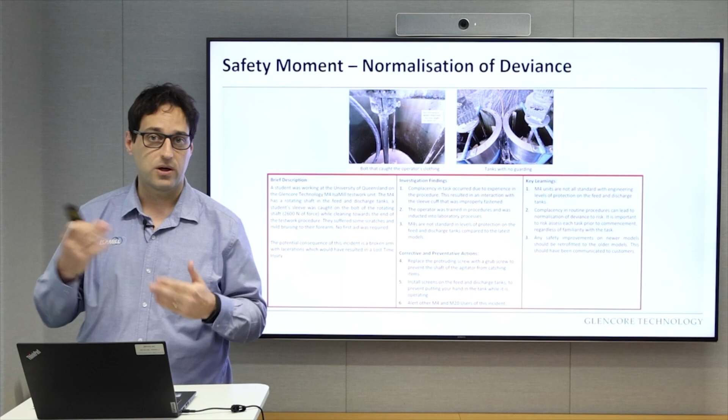Here we recognized that we needed to change a bolt and put some screen protectors on top of the tanks. The more you operate something, the more it becomes normal, and this is why it's always good to stop, reflect, and have a check whether it's really safe to operate anything.

Now, what is the agenda for today? I'm going to take you a little bit through the IsaMill technology fundamentals, a little bit on the test work and scale-up, predominantly what to look for, what to understand, and how that influences your inclusion into your flow sheet. I'm going to take you through how to size an IsaMill, a little bit about why ceramic media is important, what the SG does, the size, and at the end I'm going to go over a few of the recent projects we've been doing, as well as a few of the IsaMill developments of late. So, hope you enjoy the ride.

Now, the fundamentals. The purpose of the IsaMill is to liberate. We know valuable minerals are locked in the ore. We want to separate them through froth flotation or other processes. So what we want to do is find a way to break them up economically.

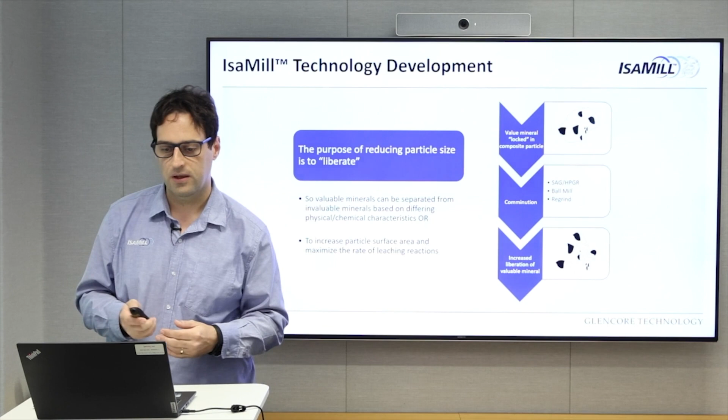Historically, everyone has always used and gone after the easier deposits, such as Broken Hill. Because the finer you go, the more power you need, and hence your OPEX and CAPEX increases. Therefore, deposits like McArthur River, with about a 7 micron grind size, don't typically get exploited first. And what happens when you need to start exploiting those deposits? That's pretty much the story on how the IsaMill came to be.

Fine grain mineralogy requires a finer grind size. In the 1980s, Xstrata, or Mount Isa Mines at the time, recognized that they had to go to 7 micron grind size. So, how do you go about it?

The first step, as you would, what do we have currently in the market? So they went out, had a look, and then started thinking, let's try to get there with tower mills and ball mills. But when they tried it, they found that when you use those technologies, the power consumption is significant, and the steel media had a negative influence on the flotation performance.

Iron dissolves in solution, precipitates on the surface of the particles as iron hydroxide, inhibiting your flotation response. So these technologies were trialed, but unfortunately no success. So what do you do? You start looking outside of industry and look at similar industries where there may be an application. And that's what started the IsaMill journey.

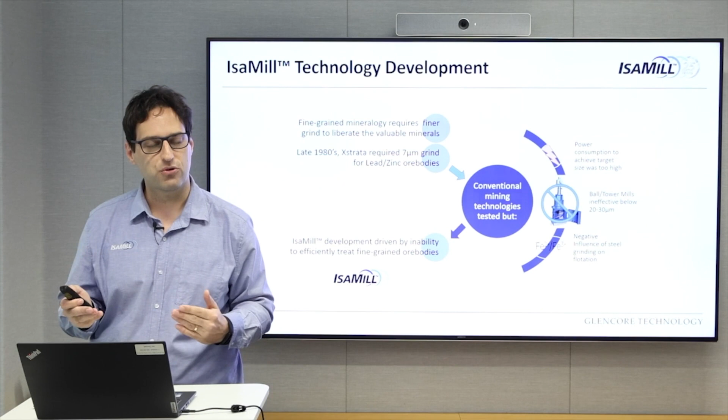After a bit of searching and looking, a technology was found. We worked with and developed a partnership with a company called Netzsch, who specialized in the pharmaceutical, food, and paint industry. They used these very small mills with small, expensive media. And when it was tested at Mount Isa, what kind of resembled a milkshake maker and a drill, what we found was the ability to stir the media ground sufficiently.

So, what next? You had to make it work in mining. So, what does that mean? Larger scale equipment, make it continuous, and you've got to make the media usage cost effective.

And that's pretty much what caused the IsaMill to go on its developmental journey.

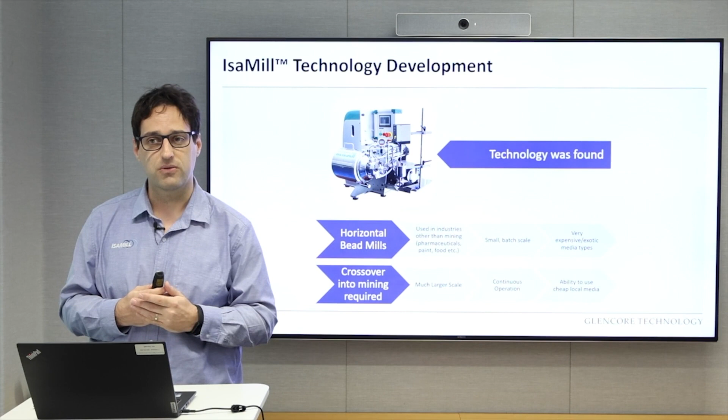So what's the timeline of this process? In the late 1980s, the first large-scale mill was developed, the M3000, developed by Xstrata and Netzsch. The terminology I use is M for mill, and the number is the size and capacity in litres. So M3000 is a 3,000 litre mill.

That mill was tested, prototyped and piloted in Mount Isa, and found to be a great success. So much so that the first official IsaMill was installed at Mount Isa Mines in the lead zinc circuit in 1994. This enabled Mount Isa Mines to advance the McArthur River mine because they now had a technology that could sufficiently liberate at 7 microns. This was a great start into the process.

In about 2001, Mount Isa Mines decided to commercialize the IsaMill to the wider market. As we did that, we started talking to more clients, and in about 2003 we started working in South Africa in the platinum industry. Through those conversations a very good point came up: 'I really like your technology, but I'm not going to put 30 of them in—make them bigger.'

So a whole lot of work was done, and we tried to scale up to the M10,000. We went from about an 855 kilowatt mill to a 3 megawatt mill. A lot of that development then allowed higher throughput rates and coarser feeds.

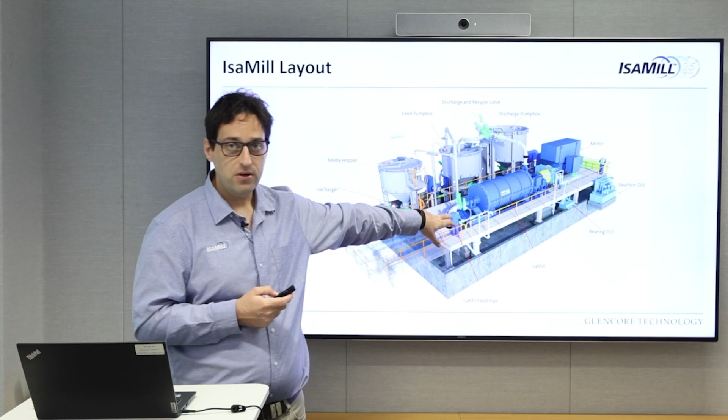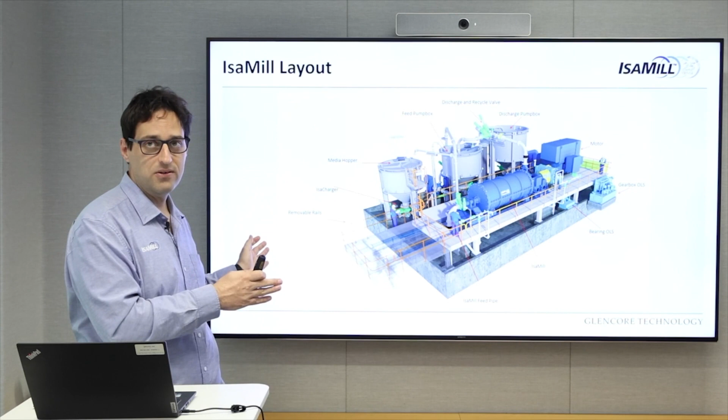We now have removable rails. The rails are for maintenance, because everything is on hydraulics—you can shut the mill down, use the hydraulic rails to open it up, and do your maintenance within 3-4 hours. So it looks good from the outside. Let's have a look at what's happening inside.

Inside the mill, slurry is pumped between 50 to 150 kPa. Inside is a fixed speed shaft with a series of discs on it. Those discs change per operation, but typically it's 7 to 8 discs. Since they're on a fixed speed shaft, they rotate around 18 to 20 meters per second.

As those discs rotate, it agitates a whole bed of ceramic media. Inside that mill you're looking at around 75% of that volume filled with ceramic media, and those discs agitate this environment. When you add slurry, you're applying centrifugal forces which pull your coarser material out and let your fine material move through the center. This means your coarser material will typically be retained while your fines move through the mill.

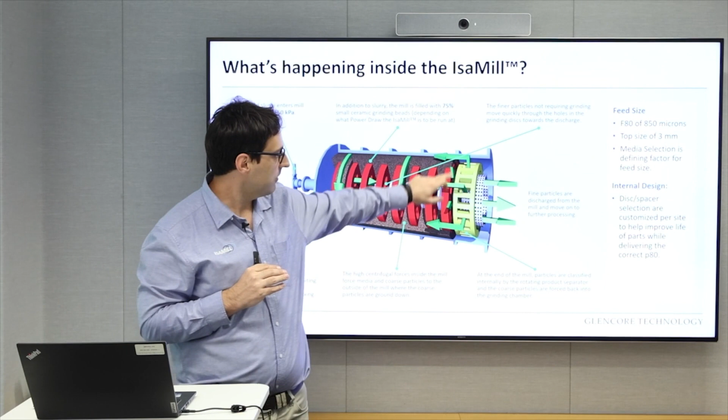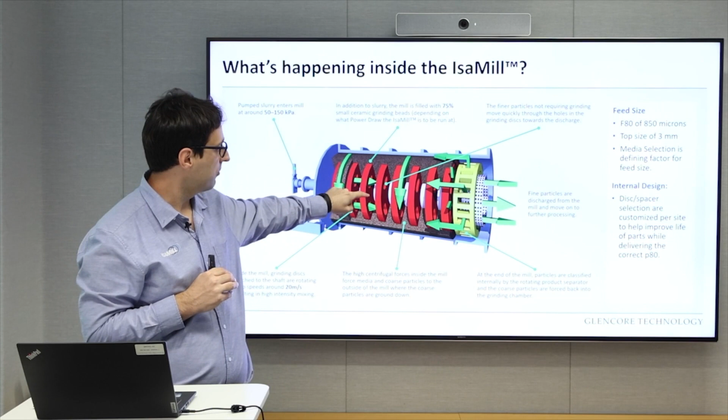When we get to the end of the mill, the gap between this disc and this rotor is actually smaller relative to the other discs, and this is done deliberately. The smaller gap creates a hydrodynamic force which pushes slurry out to the edges, and then this rotor acts as a pump, pumping back towards the front of the mill. That means coarse material that moves out here cannot move through the mill and out—it gets retained while it's ground fine enough before it can leave through the center. That is how the mill works, and that's how it internally classifies.

The mill itself can typically take a top F80 of about 850 microns with a top size of 3 millimeters, and that's lately driven by some of our coarse grinding work. But the most important thing with a stirred mill is the media you select will dictate the feed that you can put to the mill. That is key.

Now the internal design, like I said, can change. Typically it's 7 to 8 discs—small discs, large discs, different spacings—and this is all done to help the site manage wear. You want a mill to deliver what you want, but you also want to reduce the number of times you shut the mill down, so that's why we develop different components to allow you to do so.

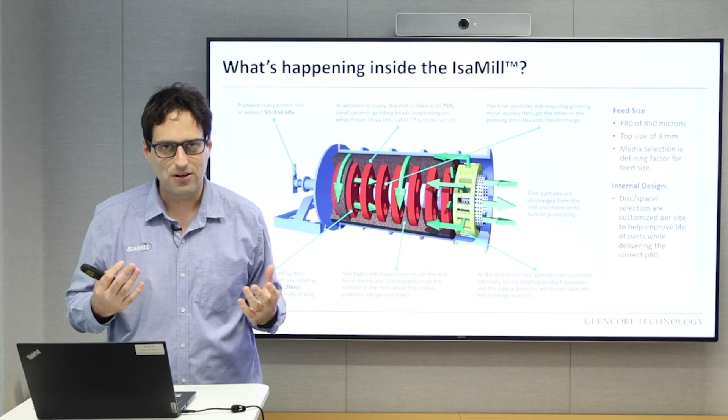Now, I talked about that rotor and that classification, and I can talk and show you pictures, but what does it actually look like? That's what my next slide is. To prove that point and really demonstrate the effectiveness of that rotor, we thought it'd be a good idea to put a glass shell on a mill.

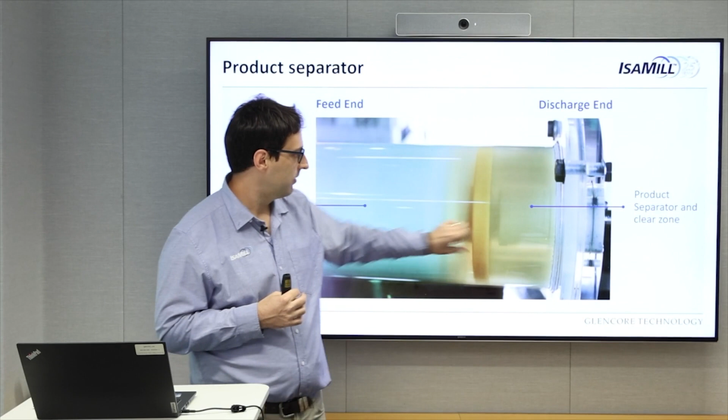So this is an M20 mill, and this is glass beads because we didn't want to use ceramics on glass, it might break it. And we started the mill up. This is a photo when the mill was running, but when the mill is stopped, the beads sit along the bottom of the mill. As the mill starts up, this zone gets an intense mixing zone, and as it stabilizes at steady state, this rotor acts as a pump and keeps all the material away. That's why in this picture you can see clear fluid, glass beads. That's that self-classification mechanism that I've been really trying to address.

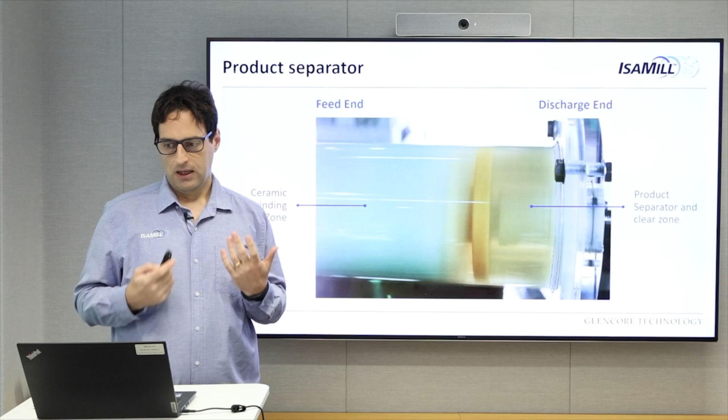Now, what's that look like when you do test work? That internal classification is going to preferentially grind coarse material. As you grind coarse material, you're going to produce a more uniform product. This mill will scale up 1-to-1 with a full-scale installation.

Here, we've got some of the older data from a paper back in 2005, but what you can see is, in the initial test work, the MRM plant IsaMill and the Century Lab scale mill produce very similar P80s and similar P98s. When the Century plant put in their full-scale mill, that P98 ratio increased dramatically. What that does is it will theoretically hurt your leach recovery and your flotation response.

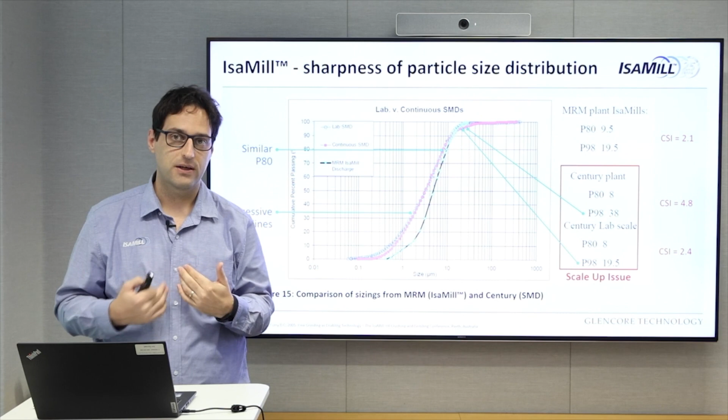In this example, we did a rough study showing you the effect between the two technologies, and the IsaMill achieved probably a 2 to 4% increase in recovery. But if I do that in a model and say I model about 125,000 ton per year copper leach plant, you're looking at about a 6 to 11 million USD revenue difference from that 2 to 4% increase in recovery. So it's very valuable to look at that.

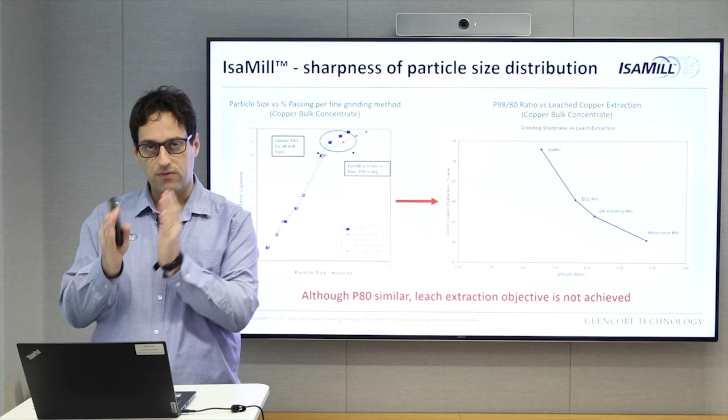And when you look at mills, always look at the full PSD. Do not focus on that P80. So that's how the mill works. But how do you do the test work, and does the test work scale up 1-to-1? Spoiler, it does.

So any mill will scale up with each other. We do a lot of our test work at labs around the world. We accredit labs to do the test work on our behalf. We don't control the test work. We do it on the M4, which is a lab scale mill, 4-liter mill, or you can pilot it on an M20 as we have down here.

We use these to obtain a specific energy. A specific energy is not the same as Bond Work Energy. It is measured through total power via the VFD. It is not inferred by torque measurements.

This mill will run a signature plot, and what we do here is a batch pendulum style test. So we have 2 tanks, batch pendulum, we fill one, pump it through the mill, send it to the other. And you do that enough times until you get to your grind size and measure your specific energy. That will scale up 1 to 1 with any size mill if it's performed in the accredited lab.

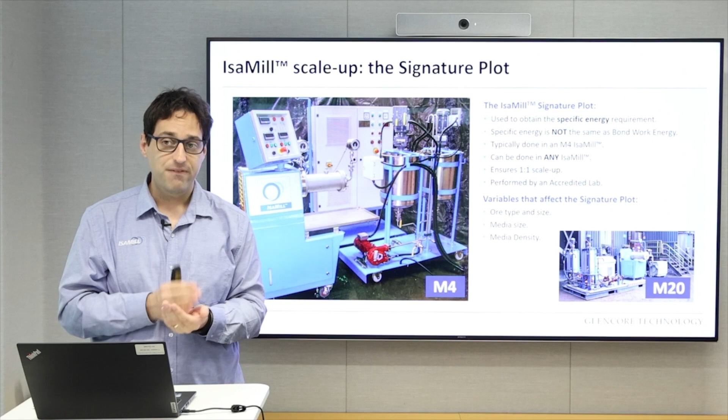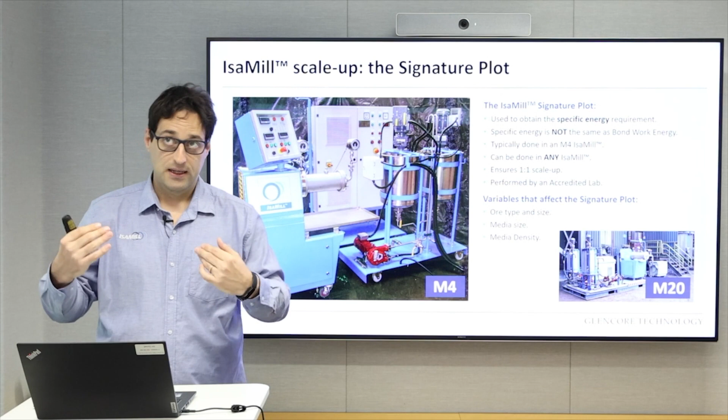Now, if I say it scales up 1 to 1, what you are aware of is you need to be aware of your ore type, size, media size, and density. That will really, if they're the same, it will scale up 1 to 1.

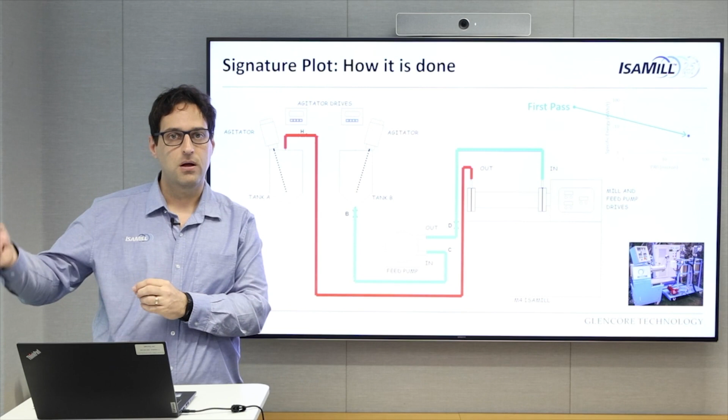I will collect the sample, I will measure the P80. When it's at steady state, I know my total energy. Therefore, I know the energy to go from this size to this size. And I'll be able to calculate my specific energy. We measure it so the particle goes through once. There's no chance of it going through multiple times, so you get an accurate representation of that grinding energy and reduction.

Now, I then want to do my second pass on the sig plot. I reverse everything. This becomes the feed tank, goes in, through the mill, and back out. It's my second pass. And you do this enough times until you get to the grind size you want.

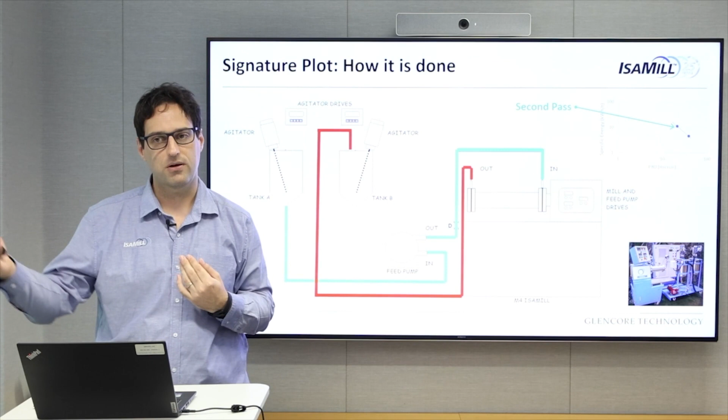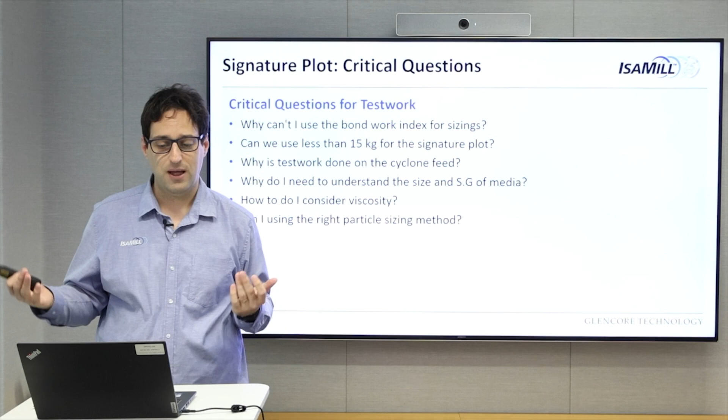So, pretty simple, but there are some intricacies and practicalities I really wanted to discuss as part of this workshop. First, why can't I use the bond work index for sizings? Some people use 5-6 kilos, you need 15. Why is that? I'll touch on that, what you actually use for your sample, the influence of media size and SG, why viscosity is important, and am I using the right particle sizing method? Let's go through these.

Everyone knows, and a lot of people will use the bond work index to generate determination of specific energy. This is quite common in comminution, but it's a little bit more awkward in stirred mills, specifically once you go sub 100 microns. The reason for that is the exponent, the minus 0.5, varies sub 100 microns.

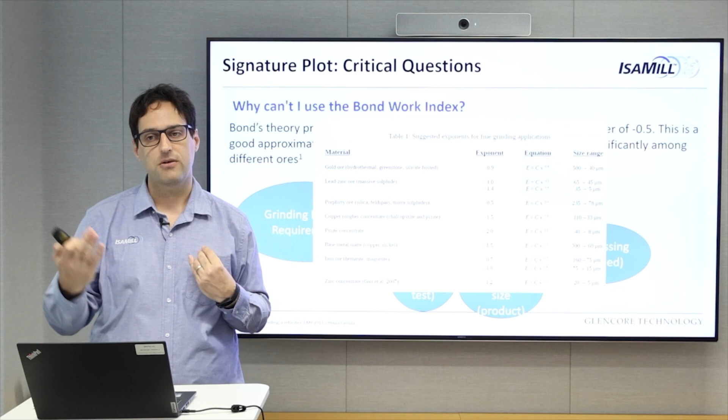Secondly, all these mills are also slightly different, so there's a bit of variability that we've seen with bond works going out there. To reiterate that point, I've referenced one of the papers from CMP 2017. As you can see, the exponent changes depending on your material. Hence, if one of these comes up, I would use bond work as a sanity check, but I would speak to GT. We can provide a specific energy from our database that might be a more useful figure to use.

Now, what if I only have 5 kilos? Maybe I can use this. That is not necessarily true. The purpose of using 15 kilos for your sample is as a rough rule. You want to have enough sample to fill that mill voidage volume inside the test 3 to 4 times over. When you do that, that drives up your sample mass.

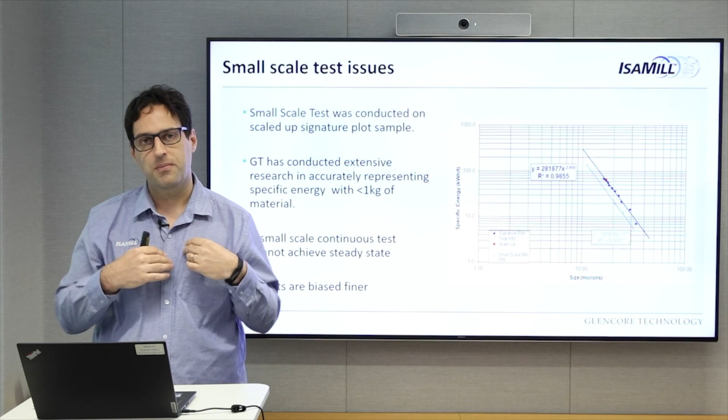It's the same sample, right? Why is it different? Goes back to that steady state - small scale tests that don't achieve steady state typically hold up coarse particles between the media, so your results will always be biased finer. If you're taking that through to a full-scale level, it can really have implications when you start looking at what your required mill size and motor size is needed. So all I really want to stress is be wary of your sample mass when you do a stirred mill test.

Now, cyclone feed versus cyclone underflow. I'm doing my mill sizing. I want to do my sizing on the mill feed. We at GT prefer cyclone feed to cyclone underflow when doing mill sizings. All our sizings are sized off fresh feed, not mill feed. I understand fresh feed and throughput rates will be more than your direct mill feed, and it'll be slightly coarser in your underflow. What we find is those two typically even out, and it will line up well.

What you can't do well in a lab - and I apologize, I'm happy to take questions if anyone disagrees - is it's very hard to get a design-representative cyclone split in the laboratory or on a full-scale mill. The fact that you can size off your cyclone feed gives you versatility if you want to size in open circuit or closed circuit, and it actually is a benefit in that regard.

Now, media size. This is one of my favorite graphs. This is a bit of a study that was done on a mine site. What really drove this discussion was, what was my required media size? We have a matrix, which I'll show you in a bit. When we did this sizing, we recommended 1.5 millimeter media. Now, as turnover happens on site, things change.

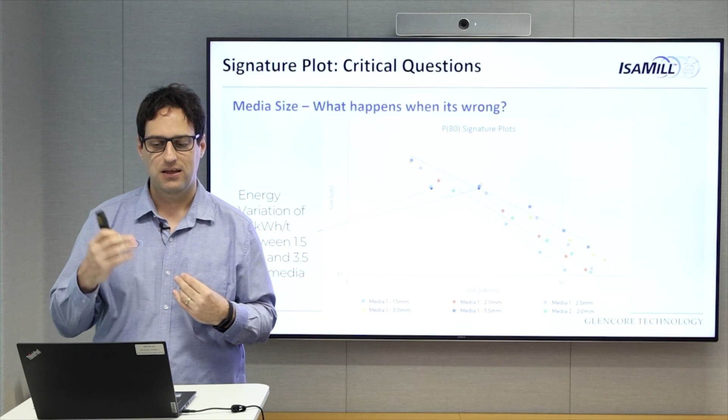Now, viscosity. Why is viscosity important? Viscosity in a stirred mill directly relates to your ability to grind. If it becomes more viscous, imagine a solid mass moving round and round. That basically drops your grinding efficiency. What we know is that operating density, particle size, and specific ore characteristics all feed into keeping that viscosity manageable.

So what do we do? As a rule of thumb, we design our mill to operate at 20% solids by volume, per the design condition. In practicality, a magnetite operation is 50-55% solids by weight, while a coal operation is closer to 30% solids by weight. But by keeping that at 20% solids by volume, we notice the most efficiency.

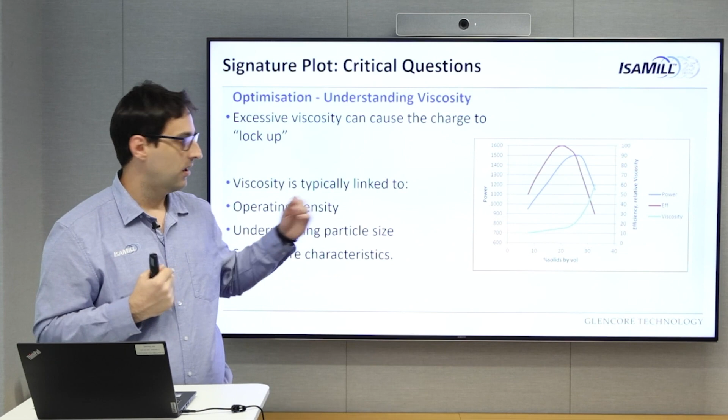This is attempted to be described through this graph here. X is percent solids by volume, Y is power. Up around that 20%, you get about 100% efficiency. Once you move past it, that efficiency drops, and so does your power draw. Hence that locking up I was talking about.

Sizing. Sizing is important. There is no right or wrong way to do sizings, but you have to be aware of the implications of the method you select.

Laser sizers work off the equivalent sphere method. What does that mean? It means it takes the volume it measures and assumes it's a sphere. That doesn't take into account particle shape. I borrowed this from a Malvern paper, but as you can see, the same volume exists between these two particles. If you ran this on a laser sizer, the 39 micron sphere would record 39, but on a screen you're looking at less than 20 micron.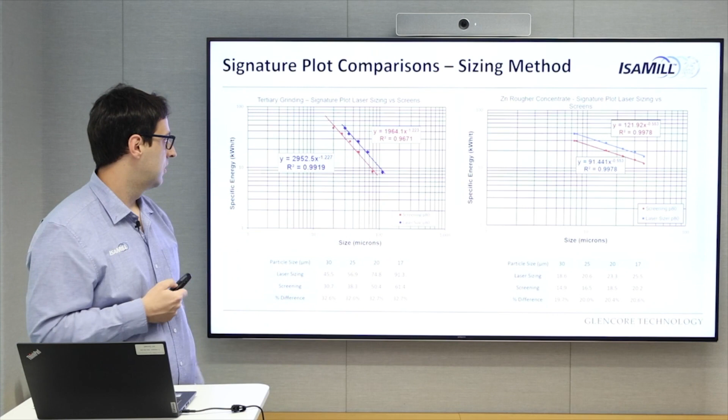This is a tertiary grinding application, a zinc con regrind. 32% improvement just based on what you used. Quite important - 20% based on what you used. Particle shape needs to be acknowledged and understood, particularly when you're looking at sizes greater than about 30 to 40 micron.

I wanted to also touch on the signature plot and full scale installations. I've talked about scale up, but I've only given you one example - that's not really helping, right? So here are a few different examples. We've got 6 signature plots and a pilot trial, and 6 examples of scale up.

Gold at Kumtor: green dot's the survey, blue is the signature plot. Platinum tails: green dot's the survey, blue dot was the pilot run. MacArthur River zinc concentrate: blue dot, linear relationship, green dot was the survey. Ernest Henry magnetite mill: same relationship. Mount Isa zinc: same relationship. Arium magnetite: same relationship. Papers are here.

If you'd like to see them, feel free to contact us, we'll give them to you. But what I really want to stress is if you do the signature plot correctly, these will scale up 1-to-1.

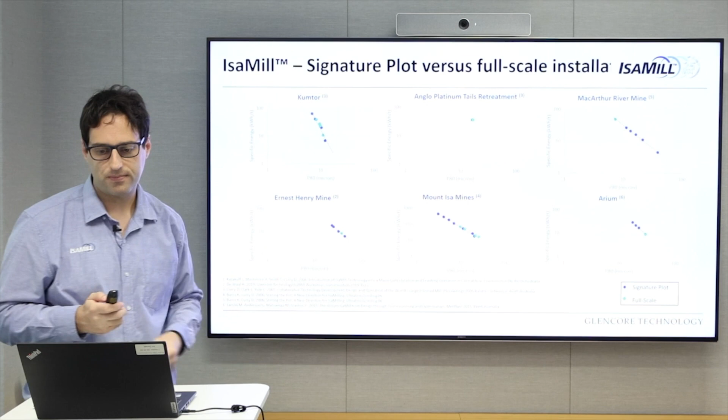So I'm not going to go into bad-mouthing different techniques that are out there, but what I'd like to stress is this is not common, and this is published information. This was an Amira campaign between tower mill estimates and measured plant performance. What you find is your vendor estimates when the mills went in versus the applied performance are typically out by up to 60% at times.

And here on the commissioning data at Sunrise Dam, you can see for a specific particle size, your energy demand can be anywhere between 40 and 90 kilowatt hours per ton. That's not 1-to-1 scale up. So potentially you want to get it right at the test work level.

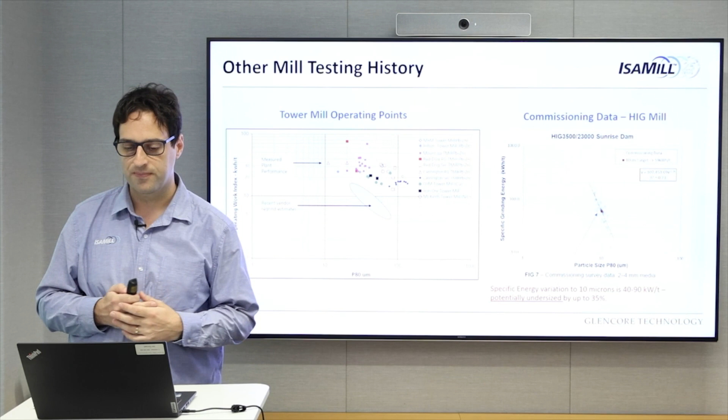So where can I do these tests? Now, there are signature plot labs all over the world. We have ALS Perth in Australia and West Coast, HRL testing in Brisbane, Core Global Met Tech in Perth, Certimin in Peru, Base Met in Kamloops, SGS Lakefield in Ontario, PT Geoservices in Indonesia, King's Beads in China, and COREM back in Quebec.

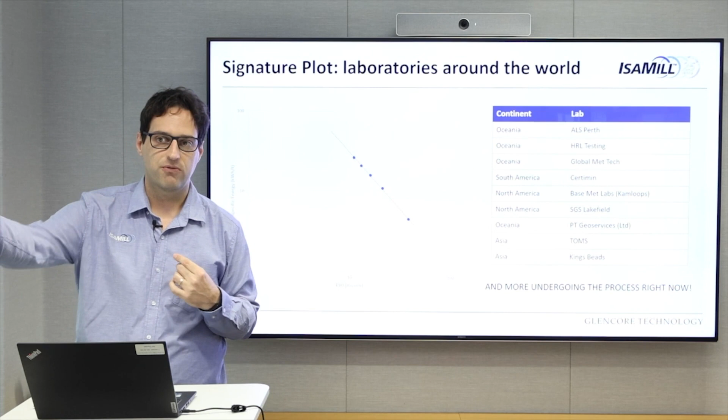We are trying to get more and more labs out there, and what we want is to have your labs as your first point of contact. They work with us, we review it, we work with them, get the conditions right, but we want them to have the autonomy and run with it. So we're very much open in that regard.

So, how do I size an IsaMill? Probably one of the reasons you're all here.

So sizing IsaMills - this is a very heavy slide, a lot of words, but sizing an IsaMill is actually quite simple. What we really need is a throughput, feed size, product size, which dictates your media selection, specific energy for your particle size, which comes from your signature plot, expected feed slurry density and/or specific gravity. That feeds into your percent solids by volume. With that, we can pretty much do a sizing. We do prefer additional information, but that's mostly because we're engineers. At the end of the day, it's quite simple to run with.

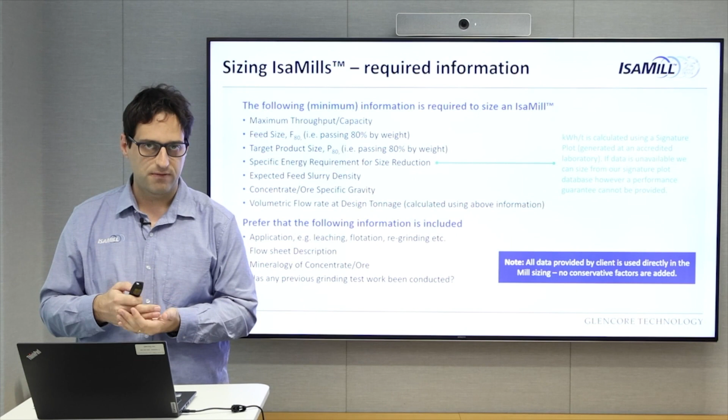With this slide, just notice the comment in the bottom right - we don't apply scale-up factors. We take the information you provide and we run with it. We don't add an extra 15% to the values because we want to be as honest as we can.

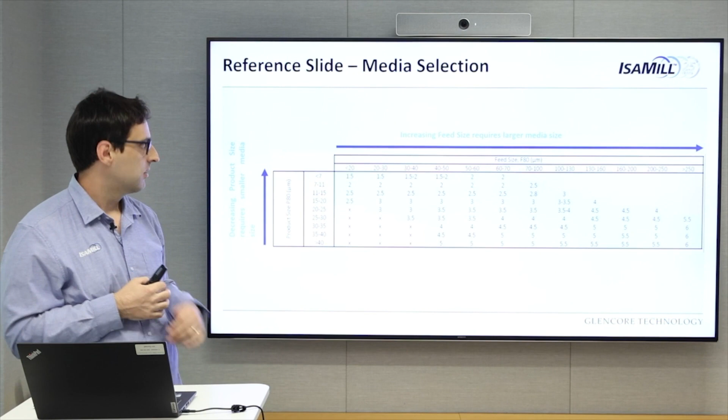So I've got my mill. Now how do I select my media? Here I've got a matrix for you. Up the top here we've got the feed size, up the left here we've got the decreasing product size. So if I want to select a media, say I want to go from 65 micron to 17 micron, I go 65 down to about 3 and across to 17 micron. So what that means is if I want to do this efficiently, I need a 3 millimeter graded charge. So now I've got my media selected.

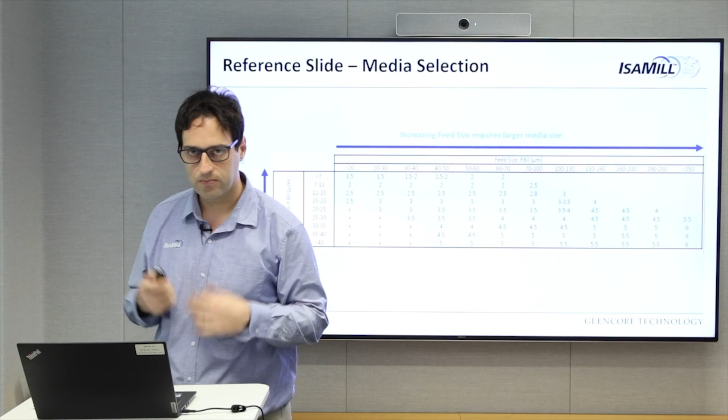Now we go look at flow rates. The mill is limited on motor capacity and flow rates, so if you're okay on your power, you just have to look at your flow rate. And that's what I've got here for reference.

A rough rule of thumb that you do need to be aware of is that all the mill components are rubber. So to protect the components, we actually interlock the mill at 70 degrees slurry temperature. That equates to a much higher surface temperature on those rubber components, but it's there to protect the life of the mill. You want to design the best mill for you, but you want to make it last as well.

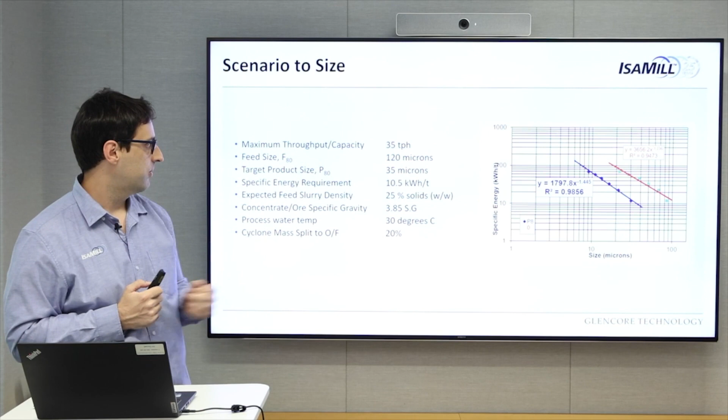So let's do a scenario. I've got a signature plot here which was done - client did this. I've got my linear scale up, and now I want to size it. In this case, I'm going to go 35 tons per hour, feed size of 120 microns down to 35 microns. From this graph here, to do that I need about 10.5 kilowatt hours per ton. It's a float concentrate, float con regrind, so that's about 25% solids by weight feed, so obviously it needs to be densified going through the mill. My ore specific gravity is 3.85, copper deposit.

My process water is 30 degrees, that feeds into your heat balance. Your cyclone mass split overflows 20%, which reflects how much you're actually feeding the mill. Put that through the calculations, I spit out a mass balance here. Key things I look for in particular are maintaining the right density, around that 20% solids by volume in your mill feed, looking at your discharge temperature to ensure your heat balance is okay, and ensuring everything balances. This is the output from a heat and temperature perspective.

It's okay, it can remain open circuit, and a mill was selected. In this case, we selected one M1500, 1,500 kilowatts. This is a standard output when we run our mass balance, and this is something we give for free. We also give OPEX numbers, but it gives you an idea of how these mills run.

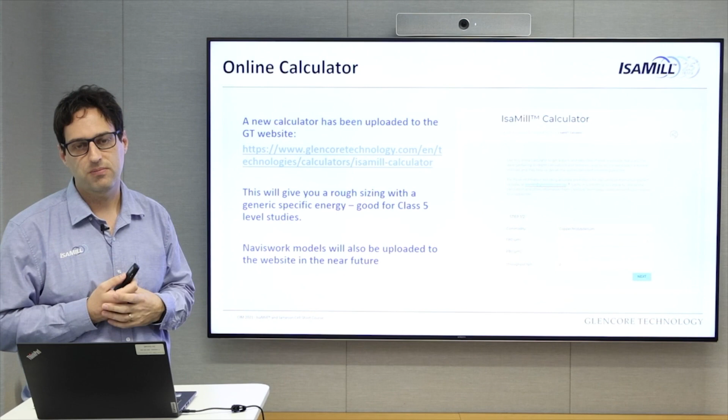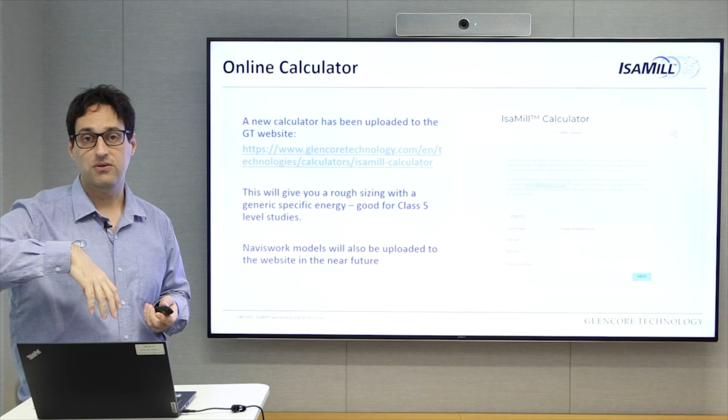Now, we can do these mass balances for you, but let's be honest, you don't want to talk to us all the time. So to try and make things easier, we've developed a calculator. It's on the website. It'll give you a very rough sizing, but for me it's good for desktop, class 5, concept level studies. In the future there'll be Navisworks models, so you'll be able to size a mill and take a Navisworks model and just drop it into your plant design. So this is coming.

So I talked about open circuit design. What happens if I go closed circuit due to heat? How do you actually do that? I wanted to give you a bit of an example in the design process.

You want to make sure your density is still efficient to the mill. You can't be too dilute, otherwise you lose your grinding efficiency. You can't be too high because of viscosity concerns. I need to manage heat as well.

So what you do is your fresh feed will come in, go into your discharge pump box. That discharge pump box will go up to a cyclone overflow. That underflow will be at 20% solids by volume and feed the mill. Your fresh concentrate will be 30 to 25% solids, will be diluted here, and it will go through the mill at the desired density and then go back to your feed discharge pump box.

Now I need to manage heat, so what else am I going to do? I'm going to add water. That water will cool it down, dilute it, much more manageable, controls it through to your cyclone overflow. That's how our closed circuit design works for heat management.

Now, this is pretty much me going through it. Key things here different: we typically have about 125 to about 200% recirculating load if we need to do so. And this is how we control it.

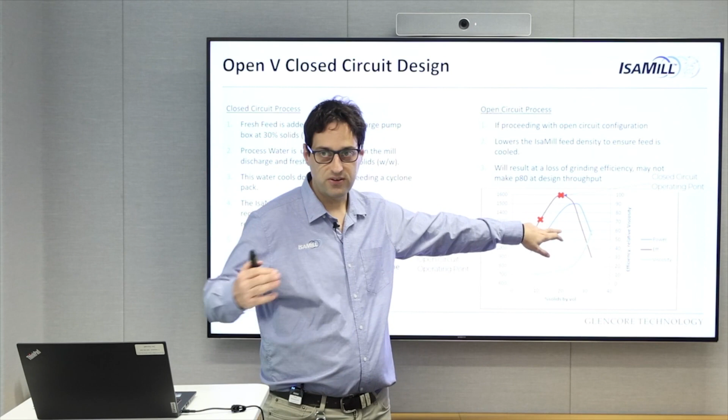If I didn't do this and I ran it in open circuit configuration, what I'm doing is taking my closed circuit operating point, close to that 100% efficiency, and just diluting it to manage the temperature. I'm basically operating the mill at about 70% of that efficiency, meaning for the same load, I will not be able to draw the same amount of power, and that grind will be less effective. That is why we do it.

If you're taking outside those ranges, you could also do a series grind. So you put 2 mills together with different medias, and that makes it more efficient. Here in a single stage grind, I'm looking at 60 kilowatt hours per ton. Now I have these 2 mills operating at that. Say I take all the feed into one with a larger media, discharge into a second mill, what would that look like? That's what we've done here.

We've got 4 to 5 millimeter media to break up that coarse material. That's 13.8 kilowatt hours per ton. Then we've used 2 millimeter media to go down to 12. What that means is there's a 17% reduction in energy by being more efficient with your media. And that's the change in the curve here - single stage, 2 stage. So, thoughts when you design circuits.

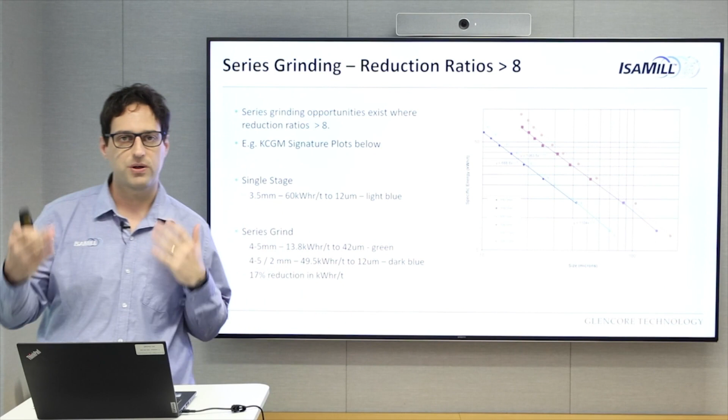Ceramic media is key and one of the key factors in any stirred mill on the market these days. Unlike most grinding mills, which use steel balls, we use high quality ceramic media. It has a considerably lower wear rate. We budget 8 to 12 grams per kilowatt hour. Some ceramic media vendors will tell you it's down to about 2 to 4 grams per kilowatt hour. So it's a lot lower wearing.

And you don't have the issue of that iron dissolution creating those hydroxides on the particles. So it's much more efficient in that way.

The grinding media, or ceramic media, basically imparts energy on a stress intensity calculation basis. The stress intensity is basically the effectiveness in that grind. And what we've found is it correlates to 3 key areas: media diameter, media velocity, and SG. What we find is the diameter has much more of an influence than velocity and SG. So if you're trying to leverage aspects of breaking up material, larger media is going to be more effective than denser media if it becomes harder.

The rough rule of thumb is media must provide enough energy to break the coarsest particles at the rate at which they enter the mill. If you don't do that, you will get coarse particle buildup, which is why it's recommended that if you have an IsaMill, you need to contact us before you do a rash media change.

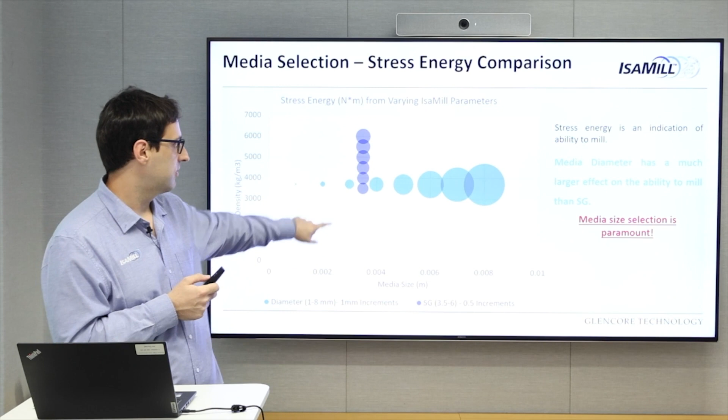Taking this to the next level, I've tried to visually represent that stress energy relationship. The area shows you the size of the influence, and here you can see media size has a much bigger influence than SG, which is what we expected.

So you're pushing this ceramic media, but how does it compare to a standard ball mill? And it's quite significant. I can talk about it, but data is data.

Here we used mild steel versus various chrome medias and ceramic. If you look at your kinetic curve, you can hit your recovery 80 to 85% versus your mild steel, which is limited to about 20 to 40%, all from using ceramic media. Improvement in particle size actually liberates more surface area, and you can improve your fines recoveries as well, which you'd expect with a stirred mill.

Taking that through to a full scale size, we've used Mount Isa copper ore. You can see the stepwise improvement from using that ceramic versus mild steel. And then you can see the chalcopyrite recovery improved on that elephant curve via grinding finer. The elephant curve is that standard blue, dark blue conventional circuit.

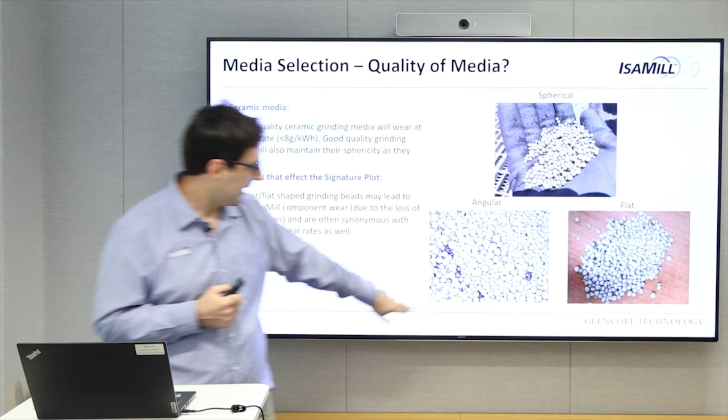So what is good quality media? Everyone's got their own opinions. I'm quite simple. Good quality grinding media basically has a low wear rate and maintains its shape. It has to remain spherical, top right here. You don't want this angular compressed cubes. What this means is media is grinding on media, there's no fluidization, or flat, which means they've cracked in half and started to wear. If you see this sort of stuff, please talk to a ceramic media supplier. They will be able to help you.

Now, ceramic media. We use 3.7, 3.8. Some of our competitors use higher SG medias due to the ability for higher SG media to be retained in vertical mills. Now, we all know this, but the higher SG media you go, the more expensive it gets.

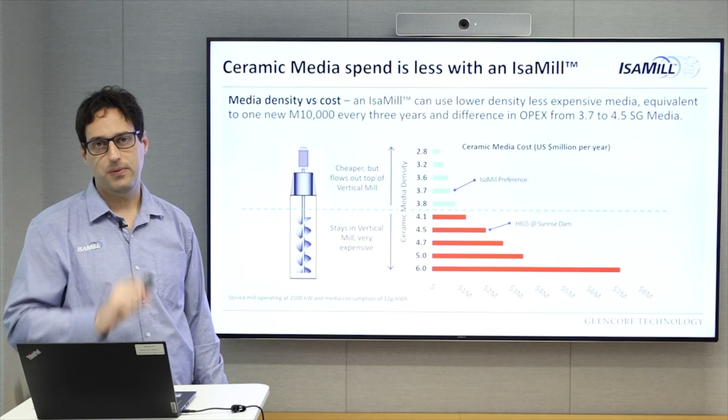So we modeled a scenario. We know the wear rates between 4.5 and 3.7 are the same. So we modeled a stirred mill operating 2,500 kilowatts using about 12 grams per kilowatt hour wear rate. A little high, which I'll admit, but still within expectations. And what you see here is your difference in OPEX just on media. That there, to put it in a rough rule of thumb, you could buy a new M10,000 IsaMill every 3 years just in OPEX savings alone from your media selection. It is a big, big selling point, and it's a big influence in your project economics.

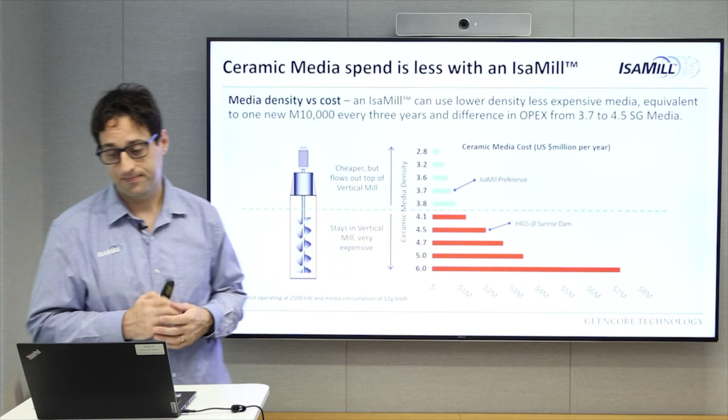But I've got new high SG media. Obviously, I don't know what I'm talking about. It's got to be more efficient. We've tested it. It's not in an IsaMill. I don't dispute other technologies, but in an IsaMill, it doesn't really work that well.

We took a 3.7 SG media, ran a SIG plot, took 4.5, same material, same conditions, ran it again. You can see a step change for the same grind size. So from 20 microns, it goes from here about 40 to 50. And what causes that? We have theories, but fundamentally we think the higher SG media, the energy you spend trying to move it doesn't necessarily make up that collision efficiency in the grind.

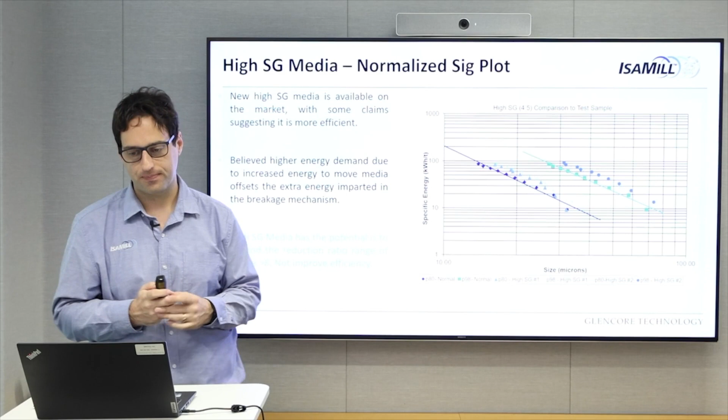So for an IsaMill, higher SG media isn't necessarily the most effective. I would encourage you to stay at that 3.7, 3.8. And to help optimize, we'll send this slide deck out to you, but this is a handy reference to have.

So, recent projects. Got a few little more things to discuss, what's coming up, what we've worked on, but I think this might be good.

2019, 2020, we commissioned this Minsur B2 project in Juliaca, Peru. We supplied the M10,000 as a plant supply. Interestingly enough, this was more about that sharpness in the PSD distribution, so your P98, P80 ratio. Our duty here was 107 micron to 74 micron. The benefit here was to avoid potential overgrinding. It was part of a gravity separation tails regrind circuit in a tin operation, and it was done at altitude with the ISA control system. I know very well about the altitude part because I went and commissioned it and got altitude sickness while I was there.

Haile Gold is a gold mine in South Carolina in the US. We supplied the M10,000 as part of the IsaMill supply. It's a pre-leach grind duty for a gold operation. Pre-leach grind is one of the main duties you see with the IsaMill. It's why it feeds into our Albion process. But here we were going from 43 micron to 13, closed circuit configuration.

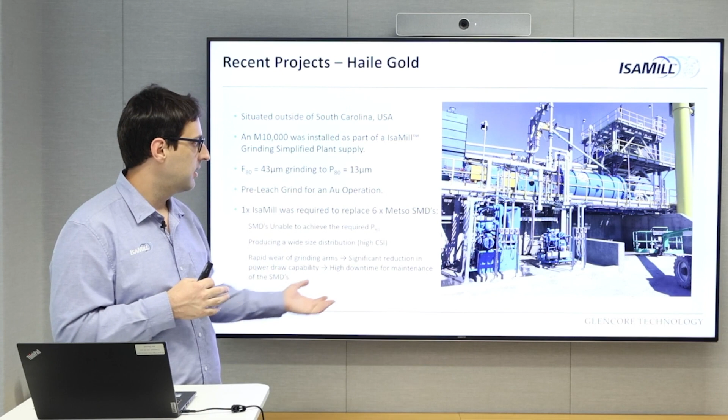The IsaMill was originally chosen to replace 6 Metso SMDs. The SMDs were unable to achieve the required P80, and like I said on that scale up you saw with the MacArthur River example, produced a wide size distribution, high CSI ratio. And the maintenance side of it wasn't great. So that was the original intent. We went in, we commissioned it, it's running well.

Red Dog - this was the first M15000 mill only supplied. This is the first mill we've done in a quaternary grinding duty, situated in the Arctic. We're going from design of 150 micron to 60, though at times in quaternary grinding it fluctuates. This was the first M15000 commissioned, and the first one we've done as a steel structure versus a concrete plinth. It was also first connected via coupling with a synchronous motor, so this mill has the ability to operate at pretty much any speed.

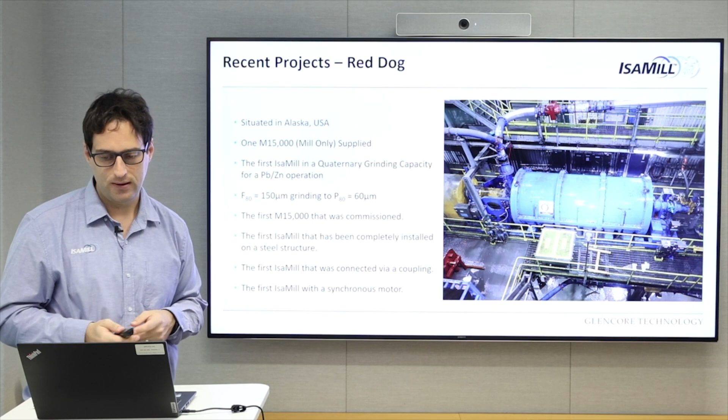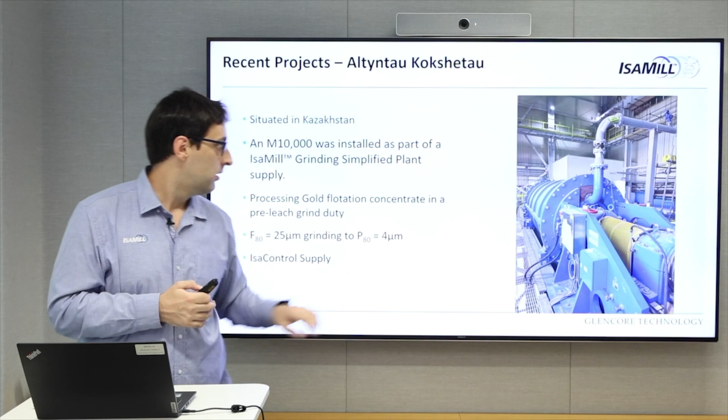ATK - this one was recently done about 6 months ago. An M10000 was supplied as a grinding simplified plant supply. This is another pre-leach grind duty, really reflects that CSI ratio I've been talking about, going from about 25 micron to about 4. Here's the mill installed, and here's the guys that did it.

Gold duty, went pretty well.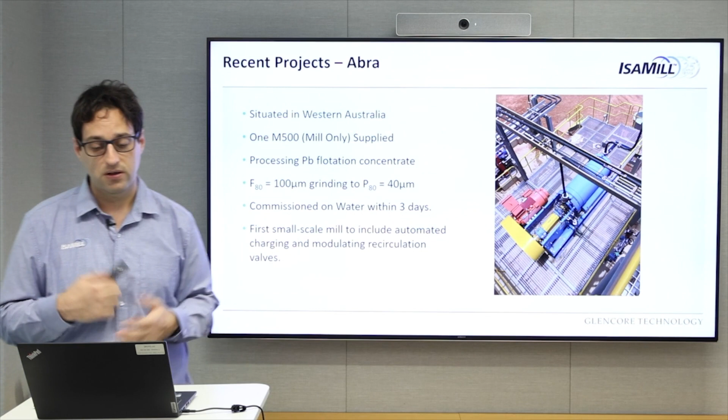Abra, M500, little baby mill. This is processing lead concentrate, going from 100 microns to 40. Some of the things worth mentioning here is the rapid rate to bring these online. This mill was commissioned on water within 3 days and was the first small scale mill to include automated charging and modulating recirculating valves. That's pretty much standard on our larger mills, but our smaller ones, not the same.

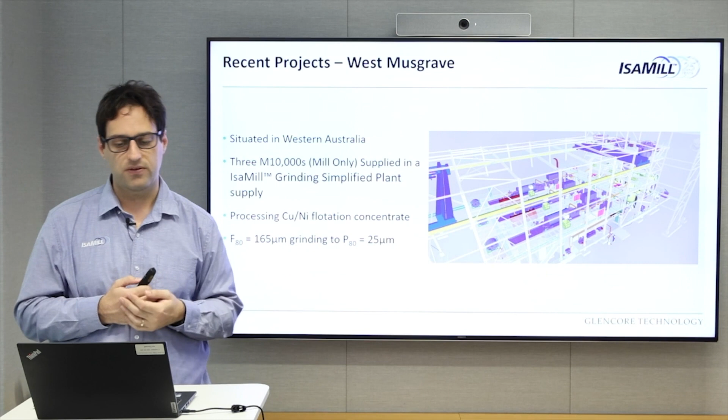West Musgrave - 3 mills supplied for that, 165 to 25 micron, just a model in the plant.

So, developments. We've talked about what to look for in test work, what you size, and some of our recent projects - but where are we headed? We're in a culture of continuous improvement, you can't just keep things steady. So what have we done? That's what I'd like to go through.

The biggest fundamental change between these designs is where we stored the media. In the old design, the media was stored in the bin under the mill. We're now producing 20,000, 30,000, 50,000 - imagine having to store all that media under a mill, you're really going to drive the height up. So what we've done is recognize that the rotor has the ability to pump media out of the mill. What does that mean? It means you can lower your platform, where your limitation is your gravity returns on your oil systems, and that allows you to save 23 to 30% of your capex steel and concrete costs.

We've tied systems into the plant supply, so you don't have dedicated gland water isocharger systems. We've been asked to make the rails removable, which we've done, and we've just tried to make it a lot more compact. What does that mean? It means it basically sits in the footprint of equal size competitor mills now, so it's a smaller footprint than what's out there on the market.

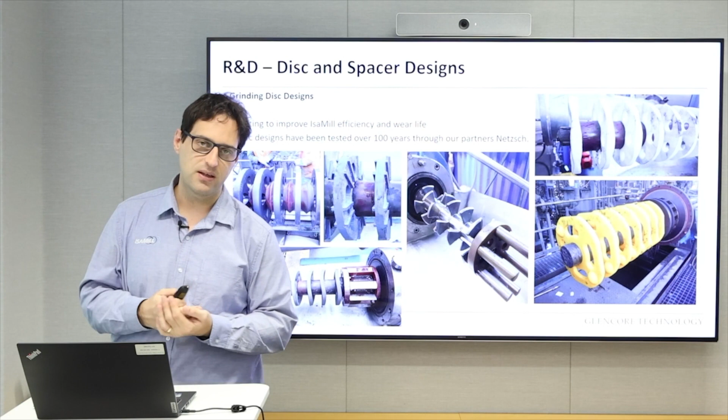Disc designs - we recognize that discs will change. We have been working on disc designs throughout the life of the mill. We've worked on components, we've worked on rubber materials, and we have tested these with Netzsch, with a history of over 100 years. We've got different spacers, different discs, and what we're trying to do is make the mill more efficient, able to draw power while maintaining that wear relationship. As we go on, as we go coarser with our feeds, you'll see some of these discs become more industry standard.

Acoustics - a really interesting area. We did a whole lot of test work back in the early 2010s, and we developed a unit that could measure and interpolate acoustic frequencies along the length of the mill. The purpose of this was primarily to look at where your media is, and see if there are changes in frequencies which correlate to wear, giving more acknowledgement of when wear events are happening. But some very smart people recognized that if you put these in the right spot, you can actually infer a particle size.

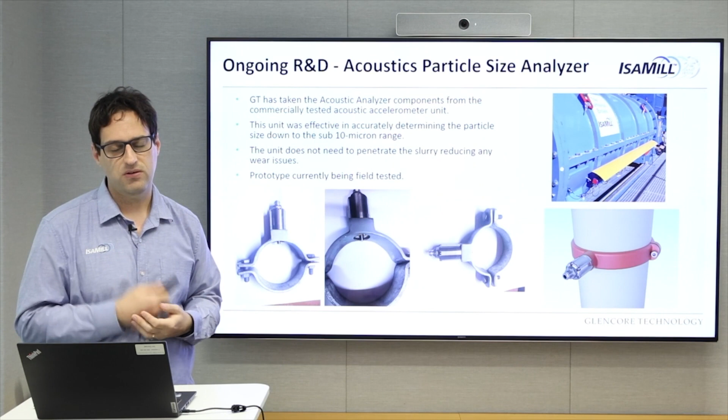Segmented shell. I've talked to you about the 30,000, the 50,000. If you want to purchase a mill larger than a 20,000, you start getting into issues with how you make spare parts cost effective. It's very hard to ship a 50,000 litre rubber shell. So you have to segment. And so what we're trying to do is find ways of doing it and make it cost effective over the life of the parts and make it easier. This whole purpose here really drives this whole segmented shell liner concept.

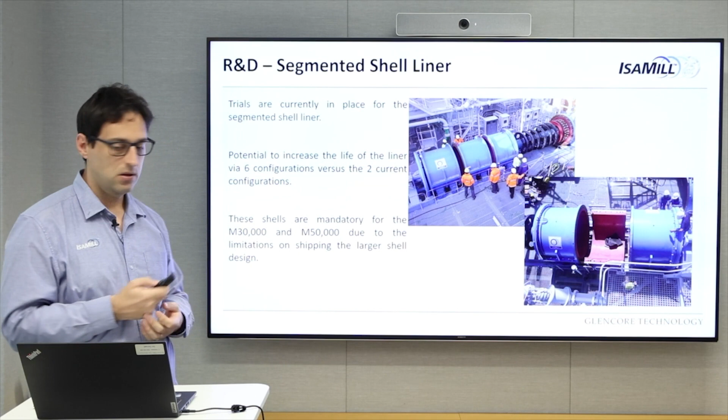Sorry, my clicker seems to have stopped. Now, I've talked about the segmented shell liner. Let's start talking about coarse grinding. Coarse grinding is something I'm particularly involved in and something that you'll see grow more and more in the future.

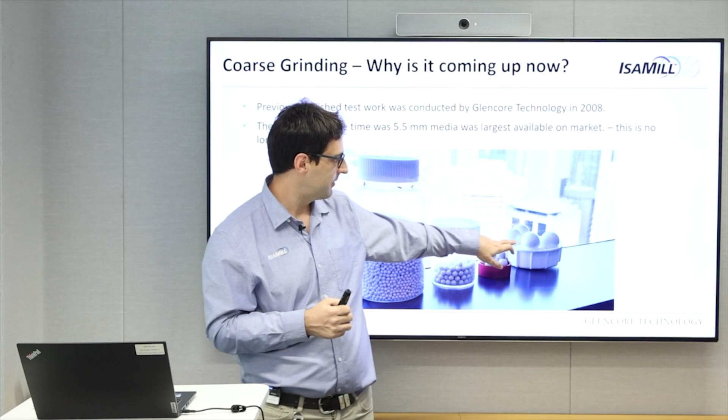It's getting bigger. So what is that going to do? I already told you your media size will influence your grinding efficiency on coarse. So what will happen next? And that's what I'm going to try and give you a bit of a sneak peek in.

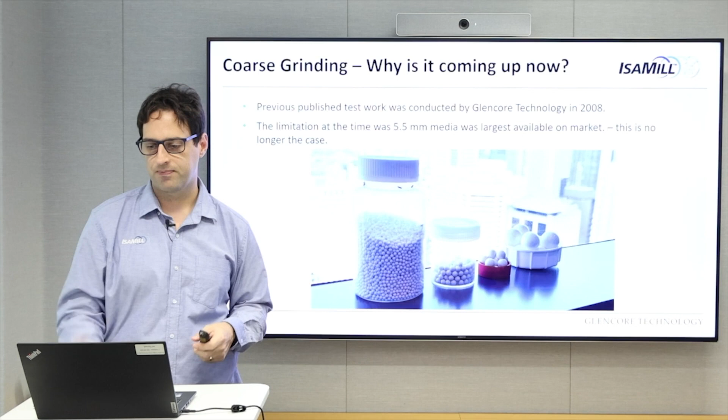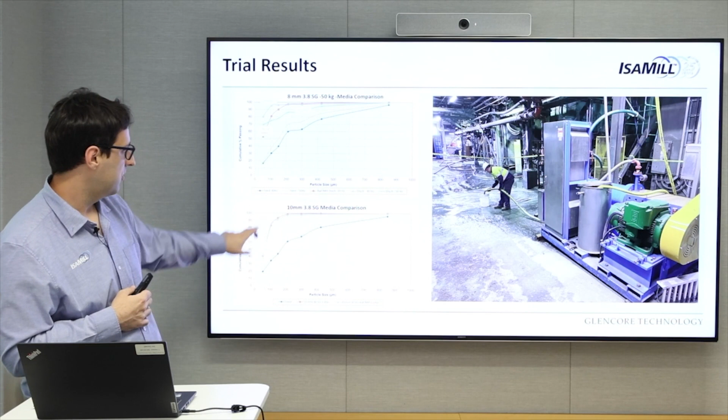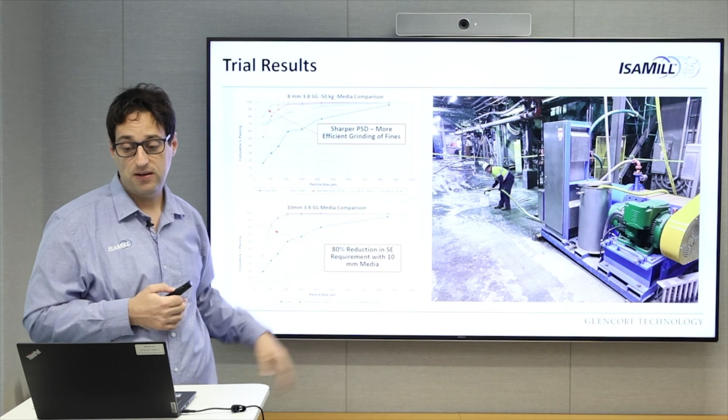And this is just reiterating what I said. Some of the highlights you can take out of it: the IsaMill does work in coarse grinding applications. I'm comfortable up to a mil. I'm trying to take it to 2-3 mil feed now.

Higher SG media does not work. I haven't got the picture up here, but that weight to move the media never made up for the grind, and we kept bogging the mill, so that didn't work for us. The 10 mil was very energy efficient, and the sharpness exists. So that is the future.

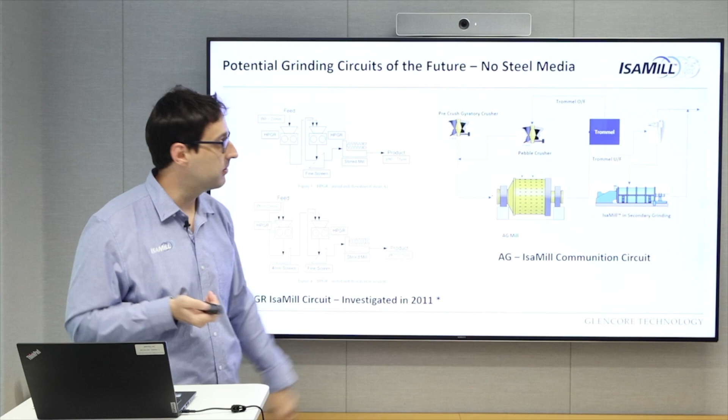And I know everyone talks about this, but we looked at the IsaMill HPGR combination back in 2011. This is a 2011 paper on it. That is the future, I feel. And if you can get that 3-4 mil, I foresee AG IsaMill combinations where you have a future with no steel media. So you have a lot better control of the circuit.